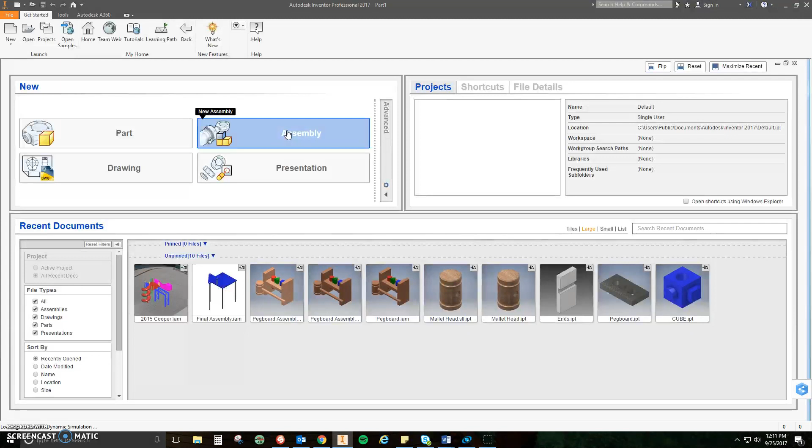The first thing that I'm going to place in my assembly is my main platform that I built. I don't want my platform to move around, so I'm going to right click on it and click Grounded.

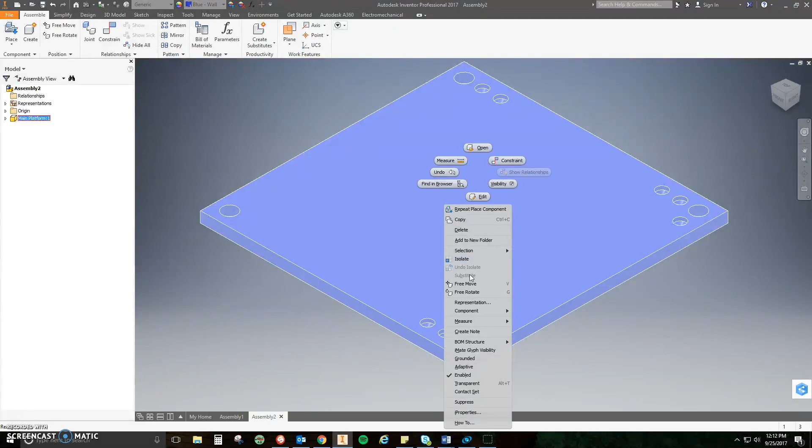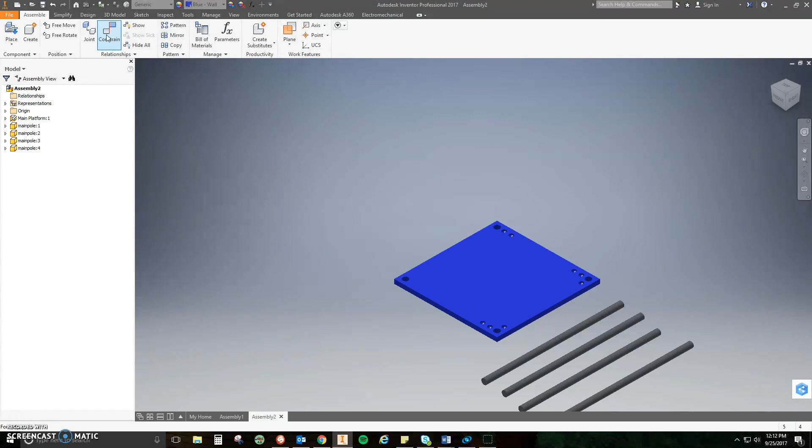The next thing I'm going to place is my 4 main poles. These poles are going to be inserted into the 4 holes on the main platform. To do that, you click on Constrain, and Insert is the 4th option over. You will then click on the end of a pole and one of the 4 holes.

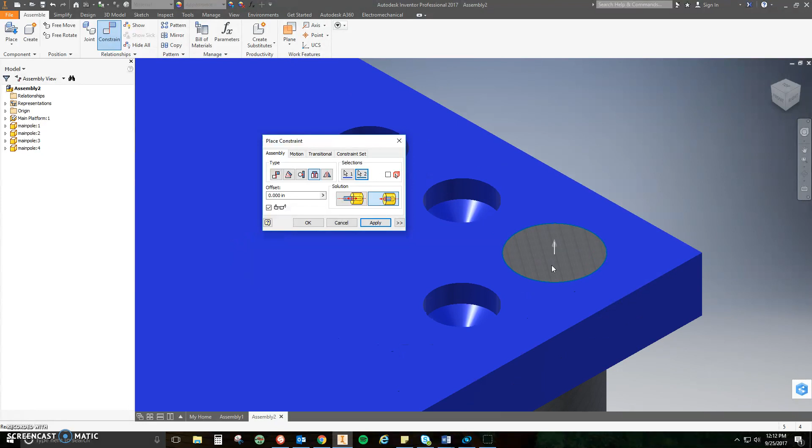If the pole goes up like this, simply click the other option to make it aligned, and you will notice that it is now flush with the top of the pegboard. You want to make sure that this is the case. Then click Apply and insert your remaining 3 poles.

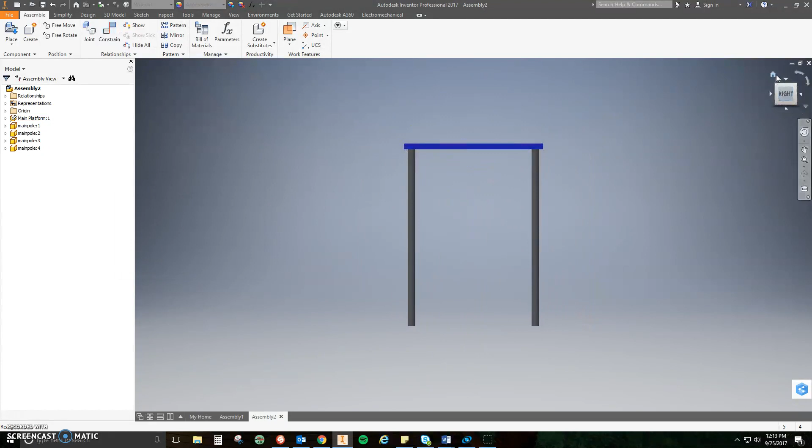Once you're done with all 4, click on your right view, and your main platform should look like this. The next thing I'm going to insert or place is my tri-platform. With the tri-platform, you're going to need 2 short poles.

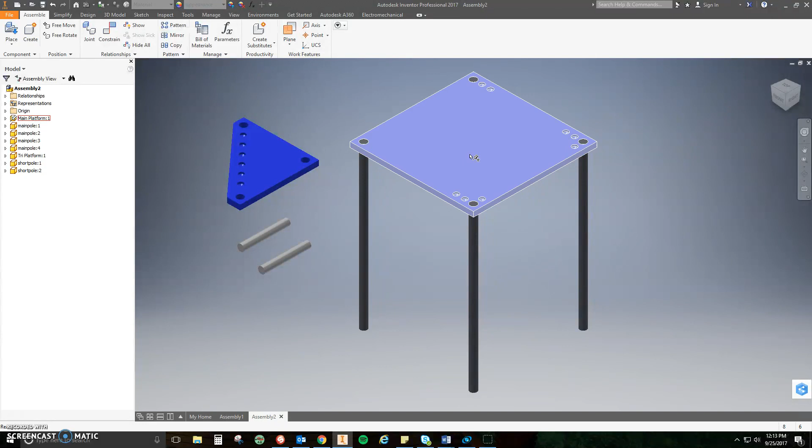You will insert the 2 short poles in the same manner that you inserted the main poles into the main platform, by clicking on Constrain, and then Insert, which is the 4th one over, clicking on one of the short poles and one of the holes, and make sure it's aligned like so.

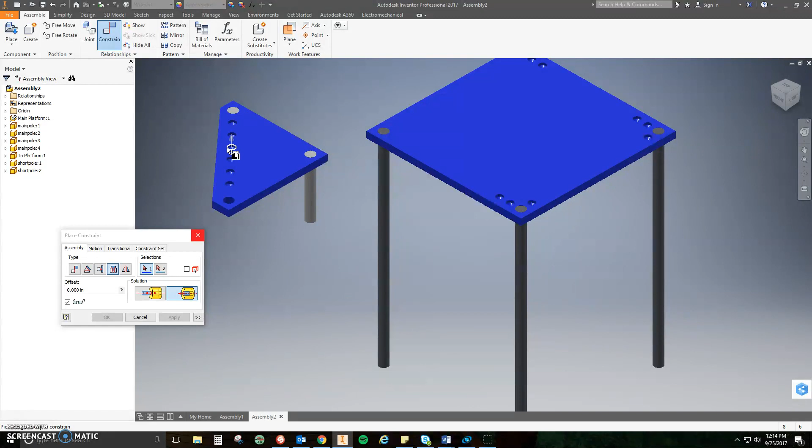The major problem comes in when students do not click the correct hole to insert the poles into. You want to make sure that you choose these 2 options and not put the short poles into the diagonal side.

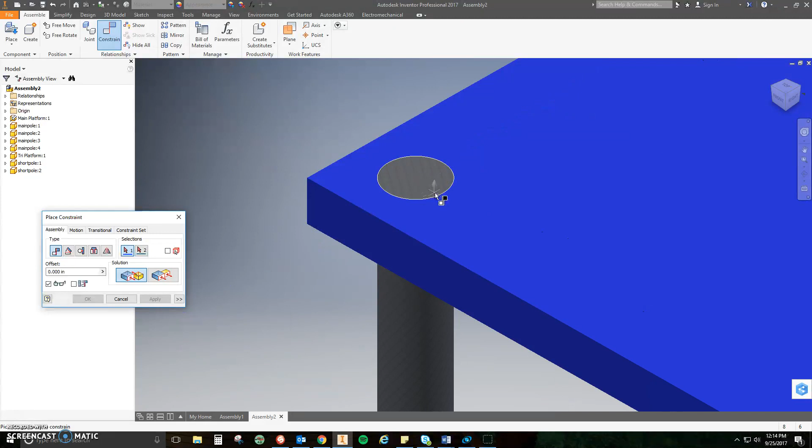The next thing I'm going to do is Mate, which is the first option here. The top of my main pole right here on the left hand side, you'll see that a green dot appears to the bottom of the pole on this back left side, and again a green dot will appear.

This mates the 2 poles together. Click Apply and close that, and you'll see they are tied together at that one point.

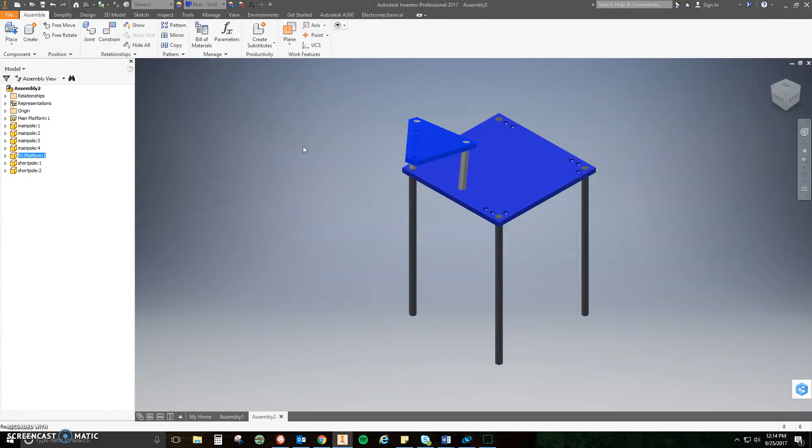The next command is a little challenging, so pay close attention. Click on Constrain, and then we're going to do an angle constraint, which is the 2nd option. And for the solution, you want the middle one, which is undirected angle.

What we're going to do is click on the top of the tri-platform and the top of the main platform. This will make these align the same direction, and then click Apply. You can now tell that they're more closely interlocked, but they can still swivel.

So we're going to do one more angle constraint on these. Click on Constrain, the 2nd option, and we're aligning the right face of the tri-platform to the right face of the main platform. Make sure you choose the 2nd solution here, and when you click Apply, they will line up. Go ahead and close that option, and you'll see it is now fully grounded and stuck onto the main platform.

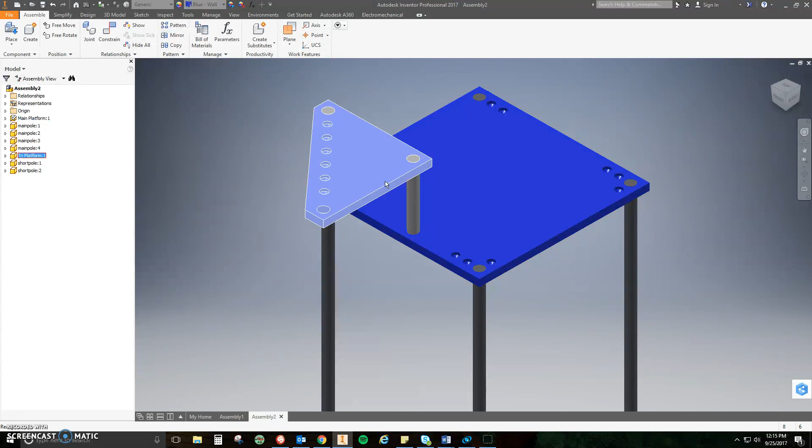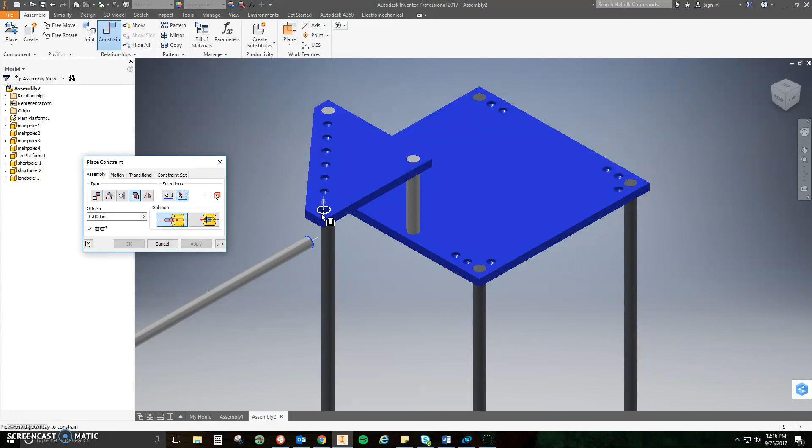The last step is very easy. You just want to place your long pole into the assembly, and you are going to insert the 4th option over, your main pole or the long pole into the remaining hole in the tri-platform, making sure that it's aligned and flush with the top of the platform, and then click Apply.